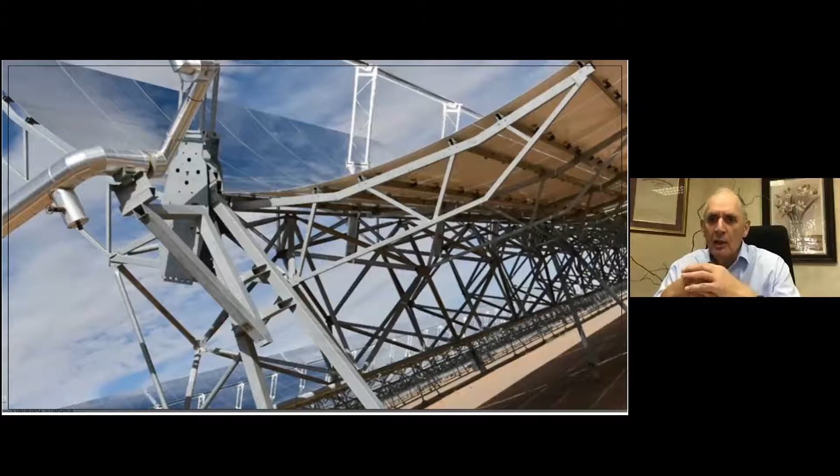So the insured, and obviously the brokers know that, they have to be declared under the annual policies. And what would often happen is we will assess the claim under the project policy, and then the annual insurers will approach us with a copy of our reports. We then, if the lead insurer is happy, release our reports to the buy down insurers. So we prefer the project policies because no one slips out from under the net.

There's a problem with these annual policies. One is the size of the cover, and the other one is whether those premiums are being paid. So we do prefer the project policies, and unfortunately now, I don't think any can be obtained now. It is a problem.

And the parties in this matter were based in Spain. Did you encounter any obstacles in dealing with European markets in terms of their approach? No, in fact on this particular matter we went across to Spain, to Seville, and we discussed the failures with the consulting engineers, or in-house consulting engineers for Abengoa, who are the main contractors.

So we interviewed the engineers, found out why and how the mistakes were made. We had no problem with the people at Abengoa in Spain, and the meetings were attended by Aon in Spain, who were also very helpful, and they explained to the insured what the cover was under the policies. No, we really had no problem. They're very aware in Europe of the cover under these policies, and we really didn't have any problem at all. The Abengoa people were excellent. It really wasn't a problem.

Do you see... can't hear you. Sorry, do you see many... sorry, claims? Dominique, can you hear me now? I can hear you now.

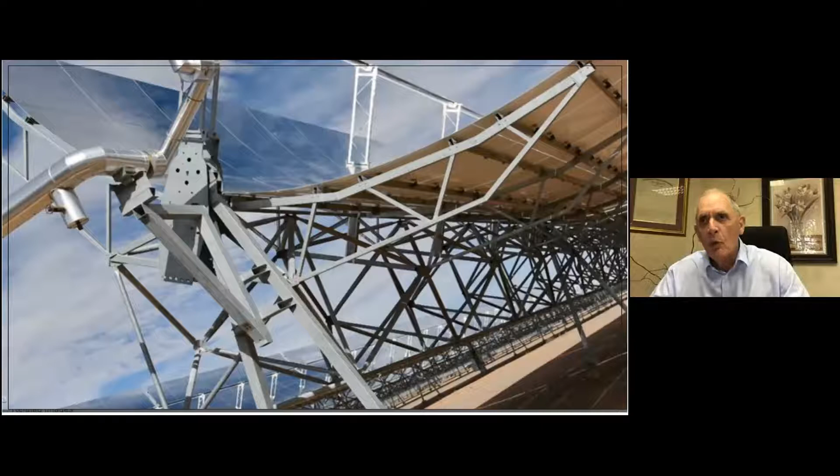That's what the PI policy comes into force for. If the engineer has made a professional error, then the policy would respond. So we interview the engineers to find out if they have made an error, and they can discuss it with us. Nothing's put down in writing, we discuss that with them, and that then goes into part of our report. So it's very unusual to have more than one engineer involved in that error—it's normally a single engineer.

Thank you. Okay, you can move on to the next claim.

Martin, there is one other question in the chat. Was there an issue regarding the actual loss? Did the damage actually materialize, or was it a fear of loss where the damage had not come to light yet?

No, that's also a good question. There are almost two totally separate issues there. Let me answer the first one: yes, the damage had occurred. What was happening, and how it was picked up, was that when the panels were rotating, they were juddering. It was not a smooth rotation, and they realized something was catching the shafts. That's when they found it, and when they started opening it up, they started finding that damage.

So the damage had occurred, so really there was no discussion. One of the questions that was going to be asked was about betterment, and that's still something to discuss. What they've done now is put back a better system—obviously you take the opportunity to put in something better than you had before. So they've changed the design and put in something better.

If there's no damage and it just has to be replaced, yes, that will still be a PI claim. But on this one, the damage had already occurred, and in fact it was ongoing damage as the things rotated every day. So there was ongoing damage to the shaft and bearings.

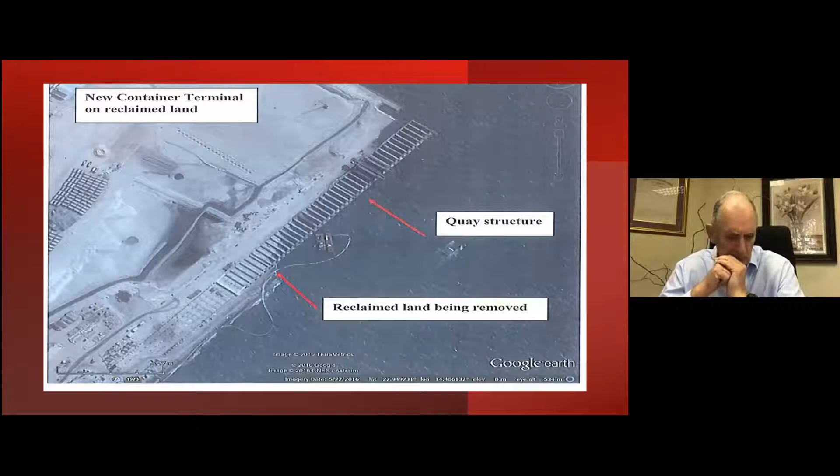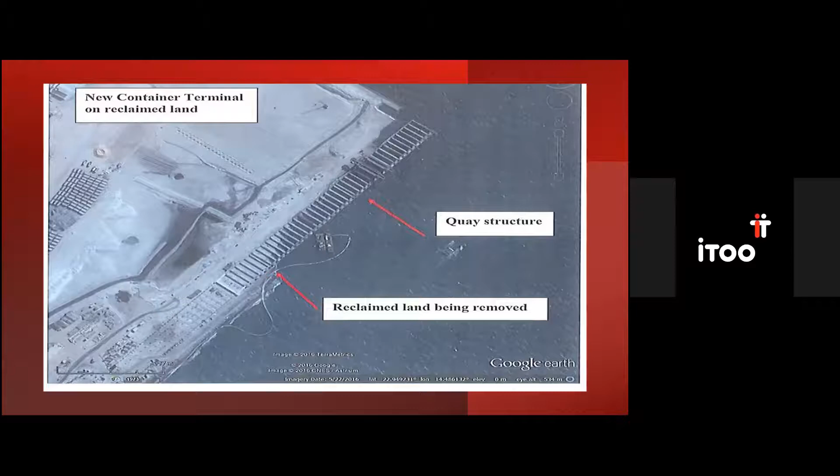Shall I start on this one? Carmen, are you happy? May I go ahead on this one? Yes, please. Okay, this was in a new container terminal, which was up in Namibia.

What you see here is an artificial island out into the sea. On the left there is the new island made up of sand, which is where Carmen is now pointing to. And on the right, the container cranes are going to be installed, and the ships will then tie up against that quay.

So that is the quay structure. What happens here is they put in 550 piles, and at the time they put those piles in, the whole of that artificial island extended beyond where you now see the concrete. It came right out into the sea. They then piled through the island, down through the seabed - in fact they went down 60 meters and put those piles in. Then they cast what you now see, which is the concrete on top of those piles.

Once that concrete was cast - that's right, exactly what Carmen is showing now - they then started removing the island away from that quay, which would allow the ships to tie up against it. When they then removed the sand, it exposed the piles. When the piles are put through the island, you couldn't see them, they just went down to the sand. But when they took the sand away to allow the ships to tie up, they found - and I think the next picture will show quite clearly -

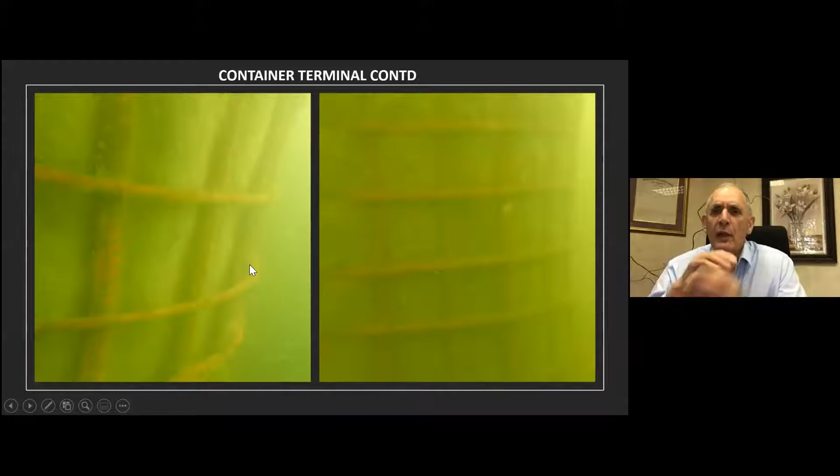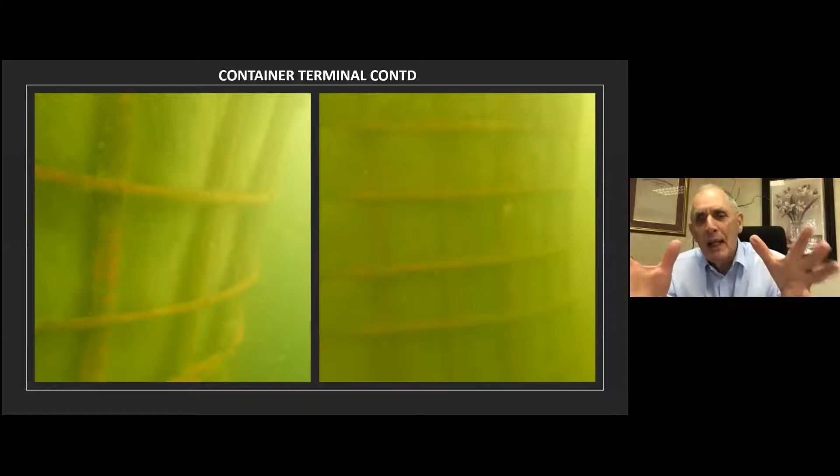what they found here. Now I don't know how many engineers are listening, but what you see here - these are pictures we took underwater - is reinforcing steel which forms the center of these piles. Now when you look at a pile, you only see the concrete. So what's happened here is when they cast the concrete of the piles, the concrete didn't go through the reinforcing steel. That steel should be encased in at least 100 millimeter thick concrete to protect the steel. So when they cast the concrete, it only went inside the steel cage and didn't come through the steel. So that steel is totally unprotected. And every single pile that they opened up looked like this. So there was a major failure with the pouring of these concrete piles.

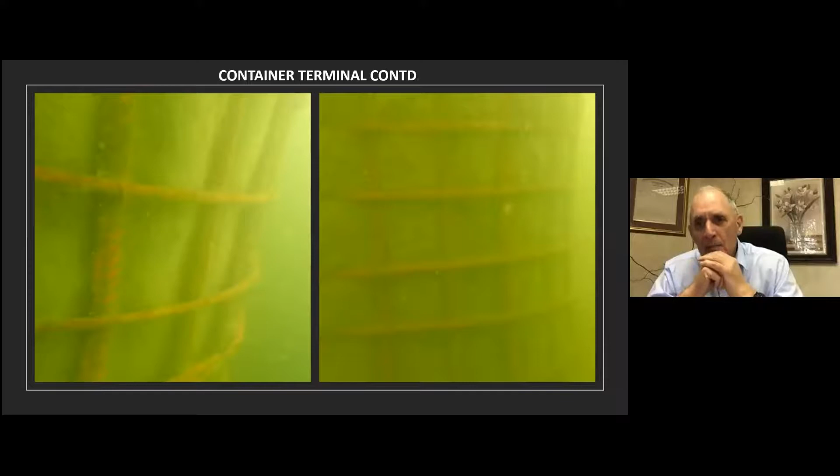Carmen, if you can just go one back - is that possible? Am I pushing technology? Okay, that's great, we've gone one backwards. So those piles are at the corner of every single one of those beams, going down both sides of that quay wall. Because of this, there was no way of rectifying those piles. Those piles were defective and they had to replace all 550 piles. They put in piles in between the existing piles. It cost about 850 million to put in the new piles.

Now they lodged claims both under the PI and under the CAR. But unfortunately, under the PI they only had 50 million cover, whereas the claim was 850 million.

So they then really pursued the claim under the works policy, which will give them full cover if the policy responded. Really what happened here is, because in their mind, only 50 million - I know people listening here, 50 million is a lot of money, but if you're looking for 850 million, it doesn't really make much of an impact. So the claim under the PI policy slowly drifted away and they pursued it under the works policy. We did both of these claims, under both the works and the PI, and neither policy responded. So in fact, the contractor was left with a loss here of 850 million rand. That's what happened with this particular claim.

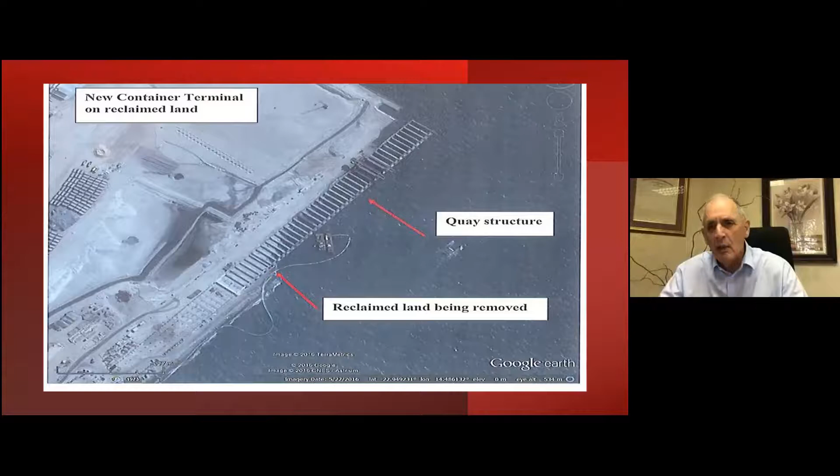Hi Martin, thanks very much. I was just surprised - why, surely when those columns were delivered, they could see that the reinforcing was on the outside and not encased with concrete. Why did they proceed?

These are what they call a cast-in-situ pile. So what you do is drill down 60 meters and put in a temporary steel casing down the full length of the pile. Then you insert the reinforcing cage, sliding it down inside that casing, and start pouring concrete through the steel into the bottom of the pile, using a thing called a tremie pipe - a long pipe that goes to the bottom with a funnel on top. As you pour the concrete, you slowly withdraw the pipe and the outside casing together as you cast it. So no, you don't deliver a 60-meter pile to site.

They're actually cast on the site. So with that in mind, would it be reasonable for an insurer to insist that they do quality control - checking after they've done 20 piles, going down there to make sure everything is working according to plan? Could we insist on that?

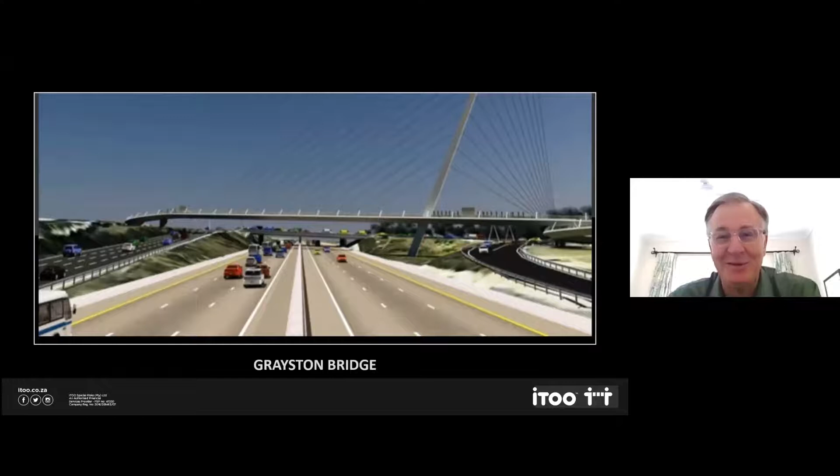Okay, but if they did, we wouldn't have any claims. Ideally, wouldn't that be wonderful? If everyone did their job, we wouldn't need any insurance policies, and more critical, you wouldn't need loss adjusters. Okay, so we better stay in business then.

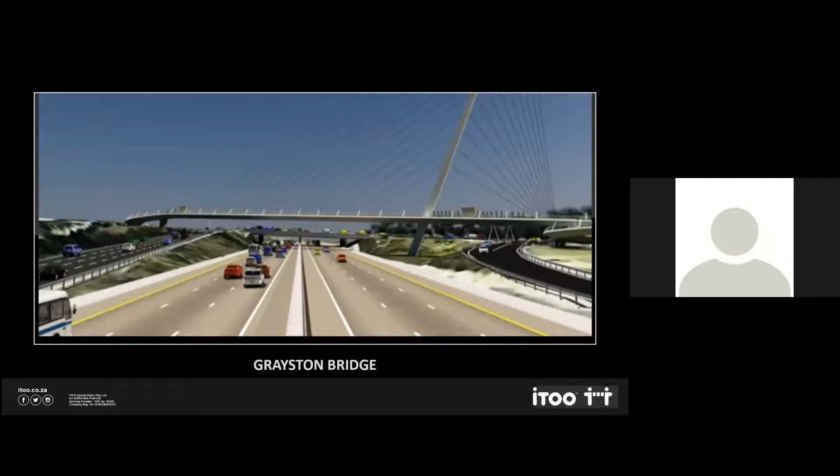Is there a prescription period on the PI claim? So just say the project was done 3 years ago and there's a design issue discovered - will the standing PI respond if there was cover at the time of the project?

A normal prescription period in South Africa is 3 years, unless the policy dictates otherwise. But a design defect does not have a prescription period - it's the time that they find out there's a design error that triggers prescription. So if, for instance, 3 or 4 years down the road they find there's a design error, that can still be made against the engineer. It's at that time the design error is found that you then have 3 years to run. So initially you don't have a prescription period up to a design defect, but you do after it's discovered.

Prescription starts running when the debt becomes due. So as Martin says, only when they find out about the issue, that's when the prescription starts running, even though it was done however many years ago. But it would be based on the type of policy you have, whether claims made or losses occurring. If it's a claims made policy, you'd have to look at your retro date to see whether or not you'd have cover.

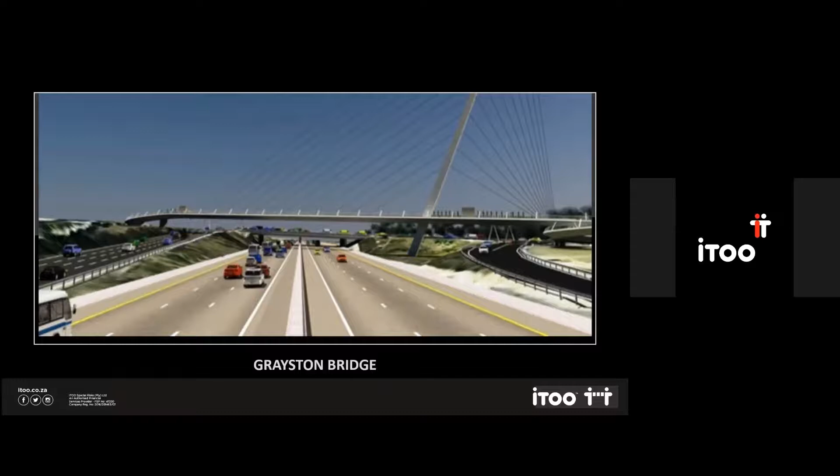Yes, that's quite correct. Thank you. Any other questions? Thanks, Martin. Carmini? Actually, my pleasure. Any other questions coming in now? I think we can move on to the Grayston claim.

For people who live in Johannesburg, this is what has now become the famous Grayston Bridge collapse. This is a pedestrian and bicycle bridge that links Sandton into Alex. It's now complete - that's what it looks like now.

At the time of the event, they had erected the temporary support work just for the center span, which goes over the highway. They erected steelwork on which they were going to cast the concrete for the center span. This temporary support was only up for one day when it fell down. The next photograph will show what happened here.

So this is the support work you see on the left, the temporary support going across the highway. If you look carefully, on each end there's a single row of supports, and in the center there's a double row of supports. So the lateral movement, any movement taken laterally, was taken up by that double support in the center of the highway. The outside legs didn't provide any lateral support.

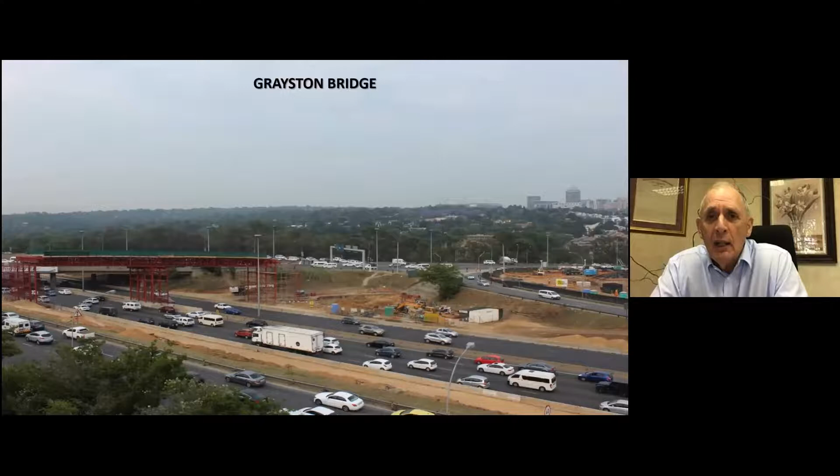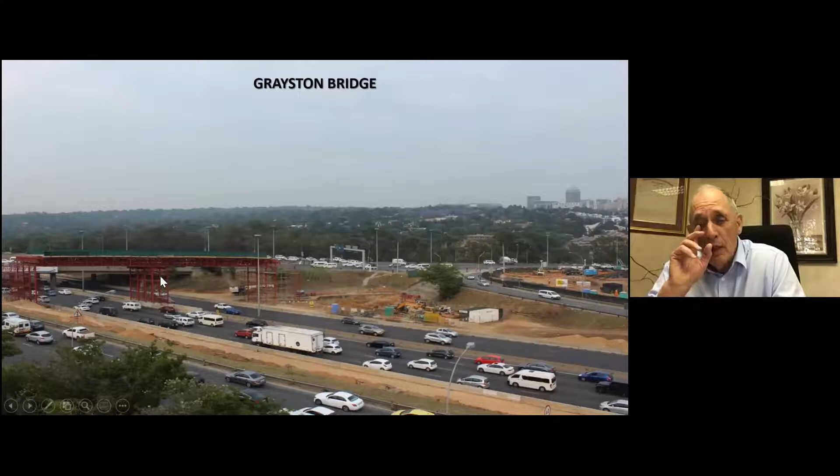Those outside legs don't provide any lateral support. So what happened, in effect, is that the ones in the center were unable to take any wind loading, and under a fairly minor wind loading it was blown over because there was nothing to prevent it moving sideways. The next photograph shows it before it actually fell over - that was taken a couple of hours before it fell down.

The passenger in the front seat was also impaled but survived, although he was in hospital a very long time. The 13 passengers - unfortunately in this country passengers in a taxi don't have seatbelts, which is terrible - so when a taxi stops suddenly there's nothing preventing the passengers from being concertinaed into the front. That's exactly what happened here. There were lots of broken arms, broken legs, broken everything. All were taken immediately to hospital.

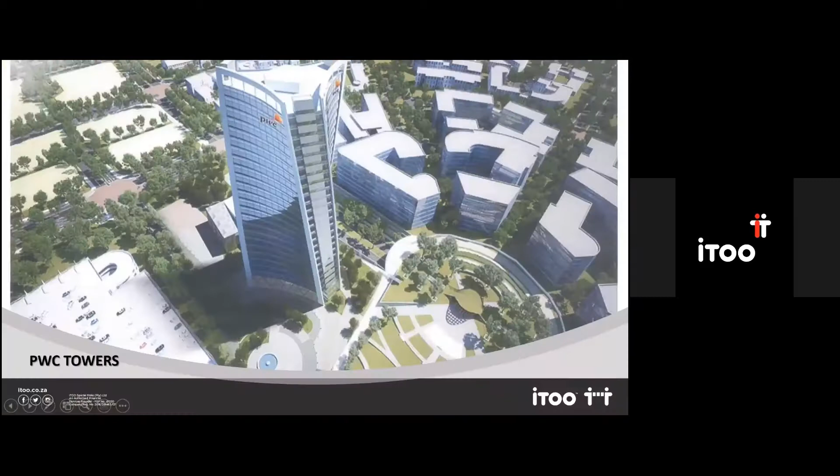Peter says he believes that the Murray and Roberts engineer managing the contract wasn't suitably qualified, and went on leave when the collapse occurred, leaving a candidate engineer in charge. He says, surely this was the final nail.

Peter, you've got a very good insight into this one, well done. Yes, you are correct. There was a very young engineer involved in the matter. He was suitably qualified, but he had not built bridges before.

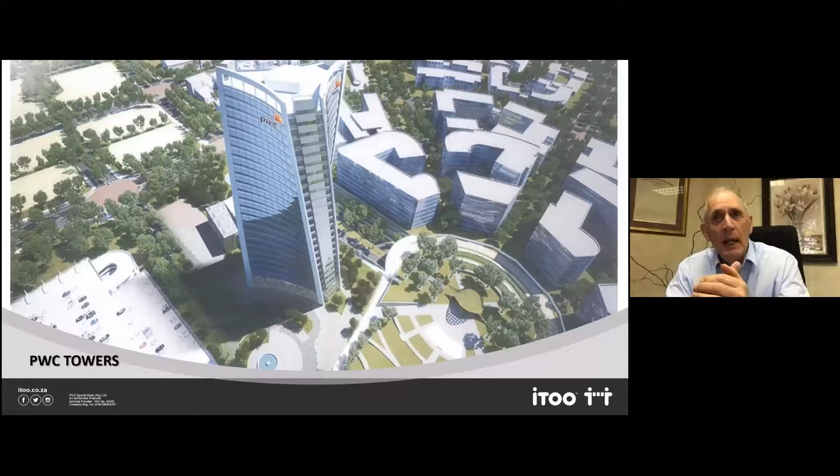I think the size of the contract was not particularly large, it was about 130 odd million, so it was relatively small. And I think what was not picked up by the parties was, although the contract was relatively small, you're building over the busiest highway in Africa, and therefore you needed a very senior person to do that, not a junior engineer.

So the junior engineer, a really good chap, just did not have the experience. But you know, the other engineers actually came to site when that center section was put over the highway.

And the Engineering Council of South Africa, ECSA, has in fact written to five engineers, and they're going to be holding an inquiry into each of those engineers. So what the final outcome against the engineers is going to be, I'm not sure at this stage.

But ECSA, they certainly were sitting in on the Department of Labour inquiry, and they have all the evidence. We don't know, nothing has followed those letters - just a letter to the engineers saying we're going to be holding an inquiry ourselves, but nothing's followed since. But you're right, that's exactly what did happen.

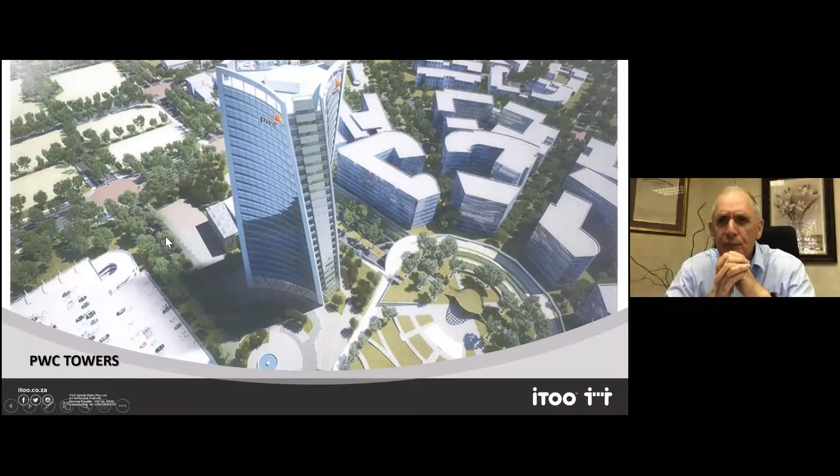So we then had to rectify that lift shaft. If you go to the next photograph - not an easy photograph to see, but we're looking up the lift shaft. We're partially up the building, looking up the lift shaft.

Now those lifts, if you look on the right-hand side, you've got your little pointer there. Yeah, there, go back a bit, a little more to the right... yeah, there. The lifts run up in that cavity. There are 9 lifts, so there's 9 cavities. That's one of them. Come down to this next one - yeah, that's right, so that's right there. So the lift also runs up there. So there's 9 lifts running up here. And this whole structure you're looking at had rotated slightly and didn't allow the lifts to be installed.

So we had to make a decision. We looked at making the lifts smaller so they would fit in the distorted openings, but the fire department wouldn't allow that, because they needed sufficient lifts to take people out of the building. They wouldn't allow us to make the lifts smaller.

So what we then had to do is demolish all that concrete you see in front of you there, except for the columns - all those beams running across, demolished the whole height of the building. We then had to put in structural steel beams and bolt them back into place. The demolition and reconstruction of that shaft was in the region of about 25 million.

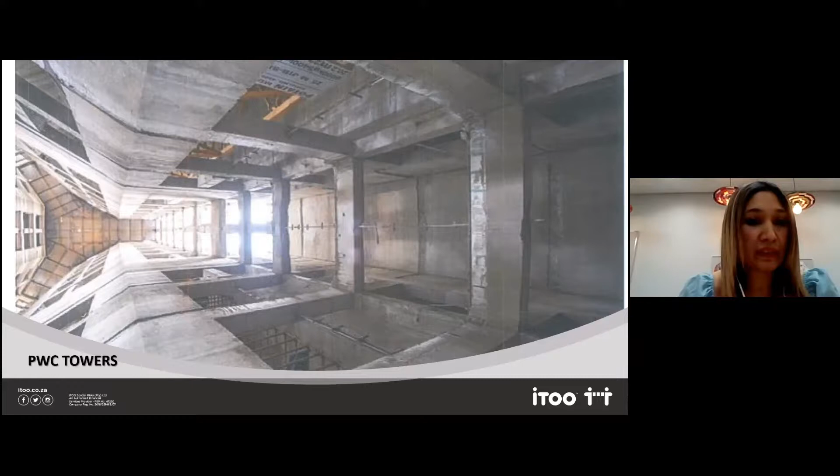I think if it's a PI policy, then we would very much go with a PROCSA or CESA standard form agreement. For the PI, we really want that. Under the CAR, as was brought up earlier, you have so many different contracts.

You have the JBCC standard contract, really for the building kind of contracts, or the smaller contracts. And then you have the FIDIC, the various FIDIC green books, red books, and white books. So there are very much standard contracts in place, and a lot of them have been tested, or the clauses have been tested in court cases, so we know what they say.

We really do encourage insureds not to change those original contracts, leave them in place. So if it says it's a FIDIC or JBCC, we don't have to read them again, we know what they say. If you want to change a clause, put it in the special conditions at the back - say delete clause 12.1 and replace it with this wording. Therefore, when we come to read a contract, we don't have to read the whole contract, we just go to the specials and see what the two parties have agreed to.

It's normally in the specials that you see where the client, contractor, or engineer has taken out the policy. So when we get that contract, we immediately go to the specials to see what the parties have agreed to. If it's a SASOL contract, for instance, SASOL will insure - they take out a policy insuring all the parties. Whereas with smaller contracts, the contractor or engineers tend to have to insure their own work themselves. So don't change the original contract, leave it as is, put changes in the specials, and then we only have to read the specials, not the whole contract.

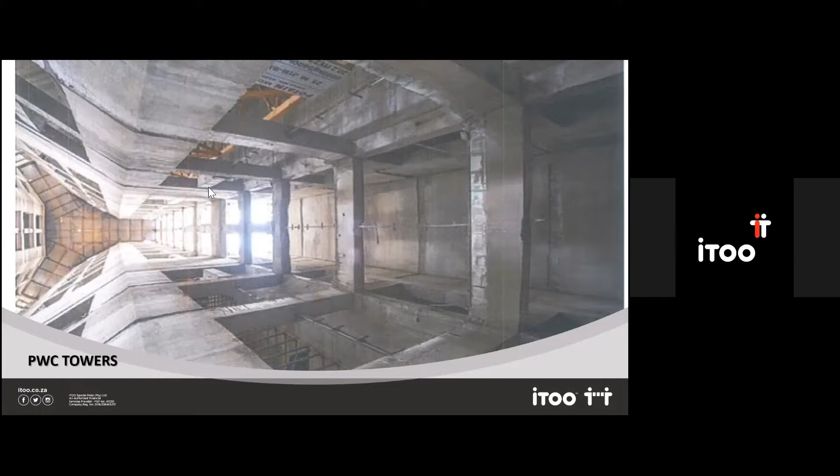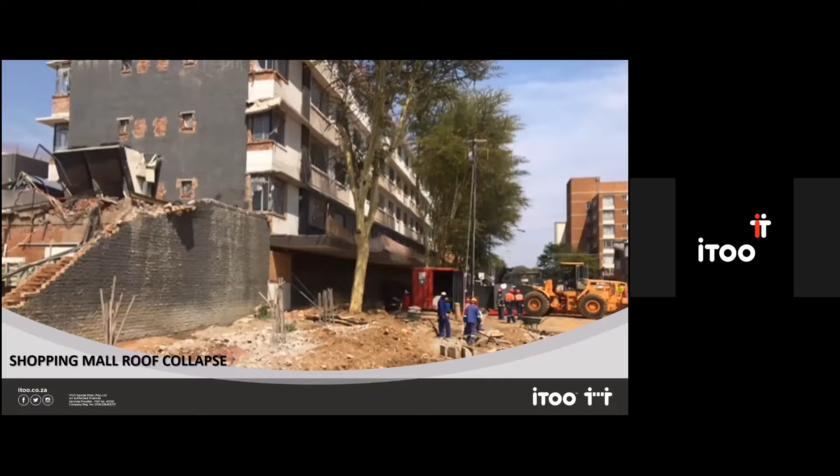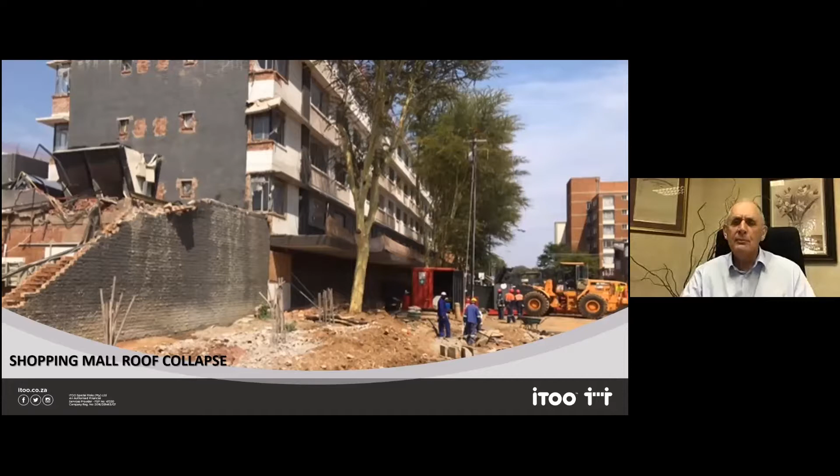All right, this next one is a shopping mall in Pretoria that collapsed during construction, and there was one fatality here - he was a foreman working for the contractor. The next photograph shows the collapse.

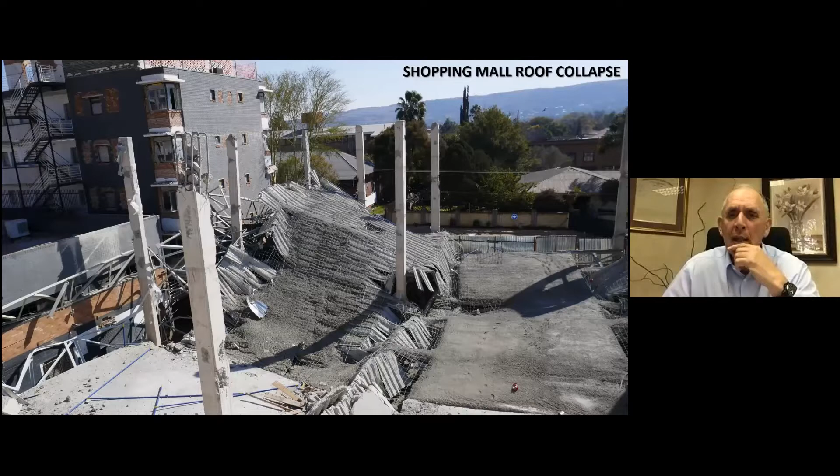So what's happened here? This was a new parkade for the Pick n Pay shopping centre - that's on top there, an existing block of flats. These columns in front of you supported 2 floors of parkade. At the time of the event, they had put the steelwork in for the first floor, and they were casting the concrete on top of the steelwork for the second floor.

So this concrete you see where the pointer is was sitting on top of those columns. Keep going, top of the columns. So that floor you see lying on the ground was sitting on top of those columns, supported on structural steelwork. And while they were casting the concrete, the entire parkade collapsed to the ground.

The person who was killed was standing on top of those columns and was flicked off onto the ground below. He fell about 12 meters onto the ground.

During our investigation here, we were appointed by the CAR insurers on this matter. During our investigations, we appointed some experts and found that the design of the structural steelwork on which the concrete was cast was totally inadequate. It was not designed correctly, and the support.

Now, if I can, Gary, just bring the pointer down to this column right in front here - yes, there, that's right. Now you can see those holes there, leave that there, that's spot on. What was in those holes were bolts on which the structural steel was supported, and those bolts were totally inadequate to take the structural steel. In fact, they just pulled out of the concrete and allowed the entire structure to collapse.

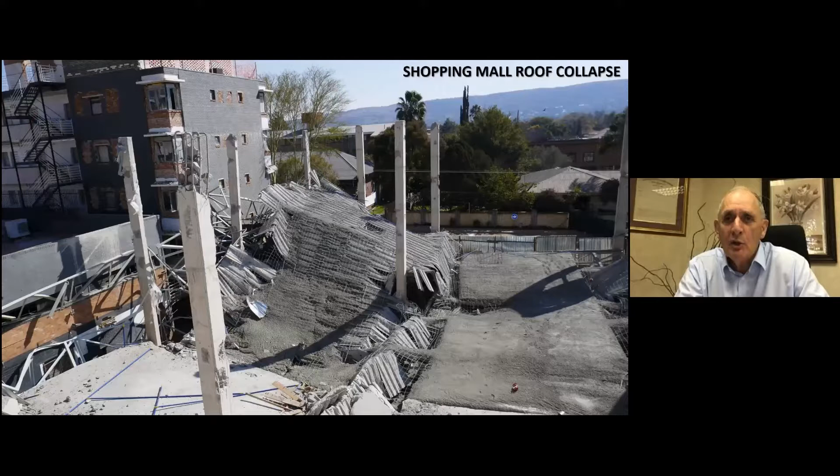Again, there's a Department of Labour inquiry because there's been one death. So that has already occurred.

And I say we are now in the process of trying to get some of our money back. Questions?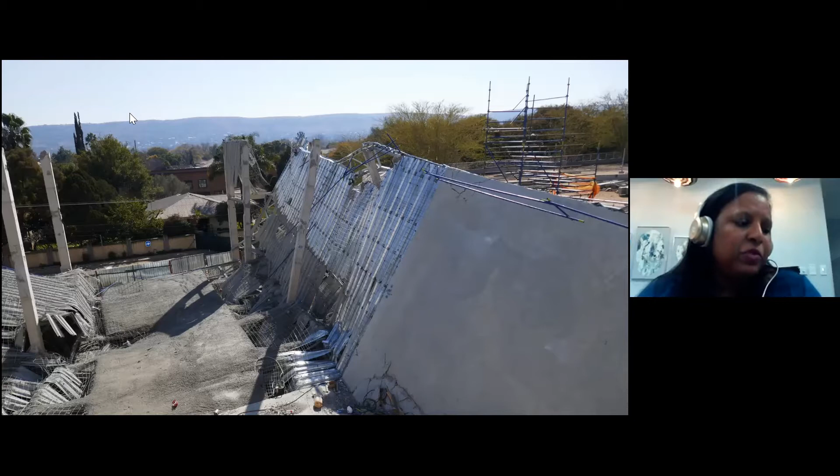Martin, how important is timeous notification to the insurer when an incident of this nature happens on site? And what are the consequences when an insurer is notified too late?

This is very important. Certainly on this one here, and on Grayston, the one we had just now, it's absolutely vital that we get out there as soon as possible so that the demolition teams don't come in there and destroy evidence that we will need. So if Grayston, for instance, had been cleared up, cut up and cleared up, we would have great difficulty in establishing actually what took place.

Here, because nothing was touched before we arrived, we could take not only these photographs, we could get a cherry picker and we could go up and actually have a look at those holes where the bolts were pulled out. So we could establish fairly early on what had actually happened. We then check it, check the design, and verify that is what occurred. But it is vitally important to be as early as possible on a claim like this.

Some claims can be longer, some claims can take a couple of weeks - it's not going to make a huge difference. But a claim like this, it's absolutely vital that we get out there as soon as possible. Very, very important.

Okay, thank you, Martin. And following on that question, what measures should an insured immediately take when an accident like this happens on site? On this particular one, the contractor must immediately cordon off the site.

And these contractors are very good contractors, Zenza Construction. They are obviously aware of this, so they keep everyone off the site. With a death, obviously the police are notified, the ambulance arrives, and then they cordon the site off so no one accesses it. It's a very dangerous site - look how those slabs are lying at one angle.